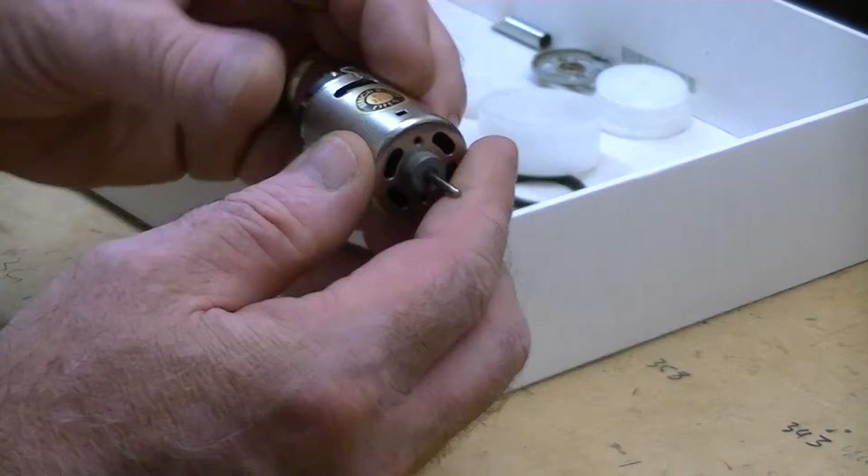I've been working away on the brushed motor reversing pump, and this is the kind of motor I'm using. It's a fairly standard, this is a Mabuchi motor 380S, so it's actually a little bit powerful for this, but there's lots of these 380 motors around, and I think these are the ones to use.

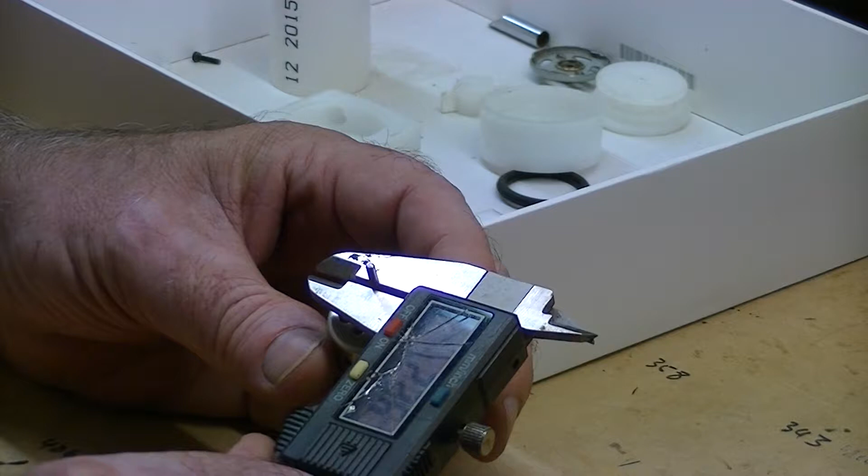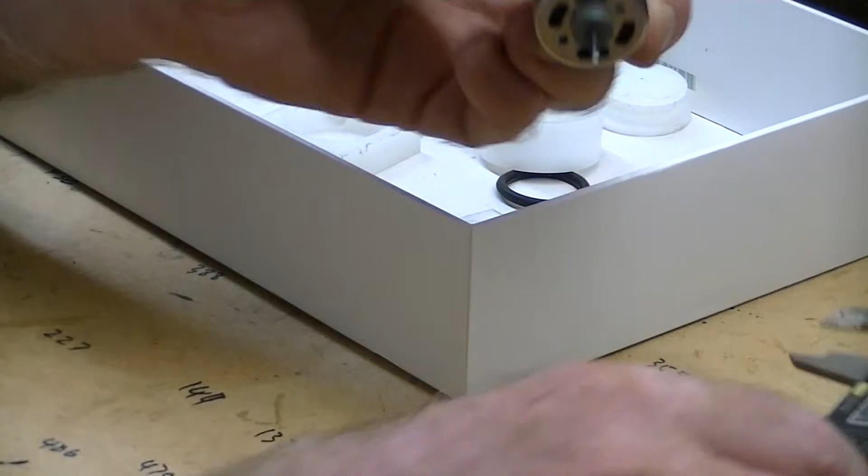The most important thing about this motor is, of course, the width, the thickness of this, which is 2.26 millimeters. They're all much the same, and this critical width here, which is 6 millimeters. So I built this around this. Well, I was going to say too, the other issue is the length of the shaft, because that tells us how much we can build on top.

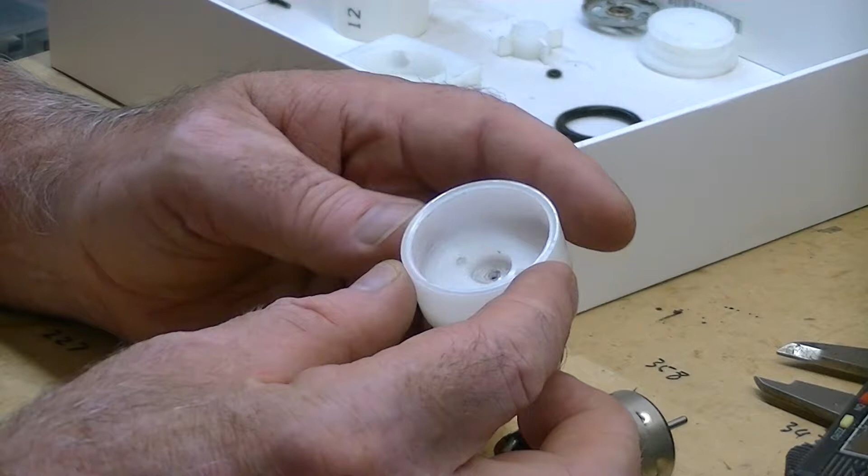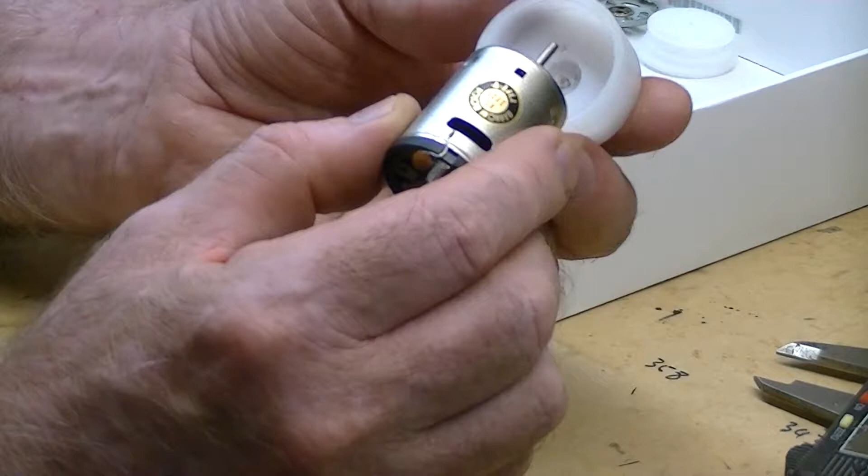So the first thing that I've done, and we'll look at this in a moment in some detail, is to build the mounting for the motor. And the critical parts about the mounting for the motor are the accuracy of these two little things. It's always been very difficult for me to do it, but with 3D printing it should be much easier indeed. So I've put this little groove in here which basically takes care of these little mountings. They're on all of these particular motors, and that screws into here like so.

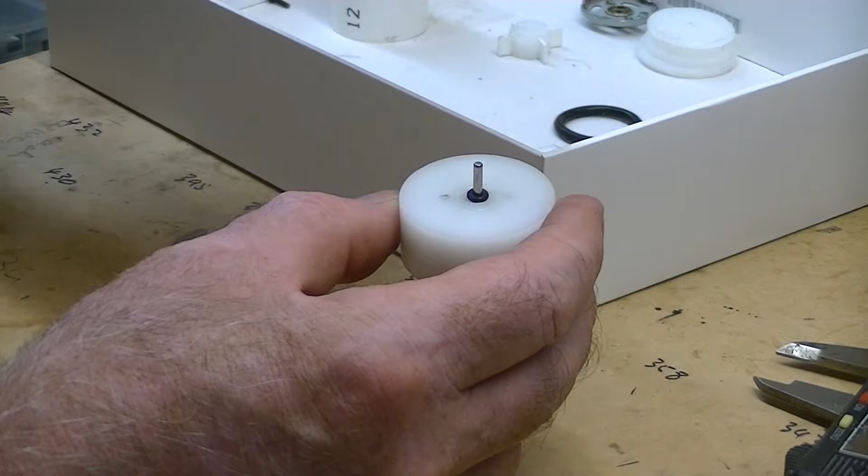There's a little groove in the middle of this too, another little slot, and on here goes our O-ring, and then onto the O-ring we screw this, and this is the holder for the impeller. Now two screws go in here, screw it all together, and as it screws it together it pushes down the O-ring, and this thing won't leak at all.

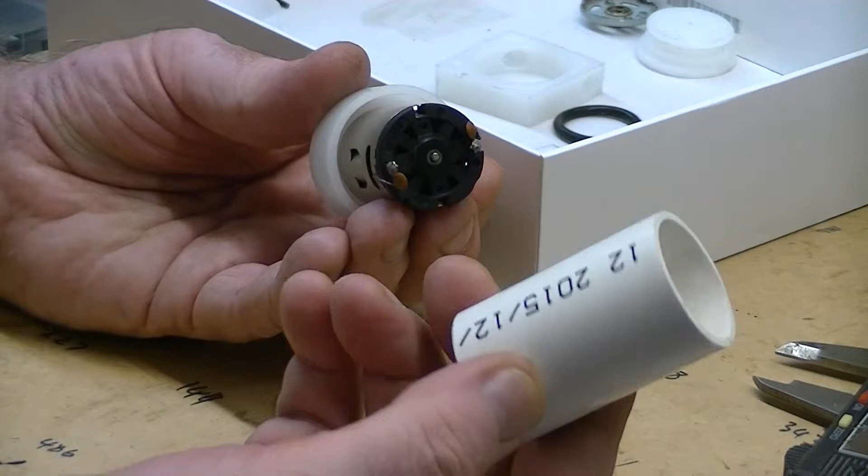Once you've done that, this is the little impeller that I've made. That clunks onto there. It's got a little bit of a gap at the bottom so that it doesn't touch the screws, and then we just have to put a cover on there. The final thing, and I'll take that off just to show you this, is that this is PVC pipe that you get from any hardware store.

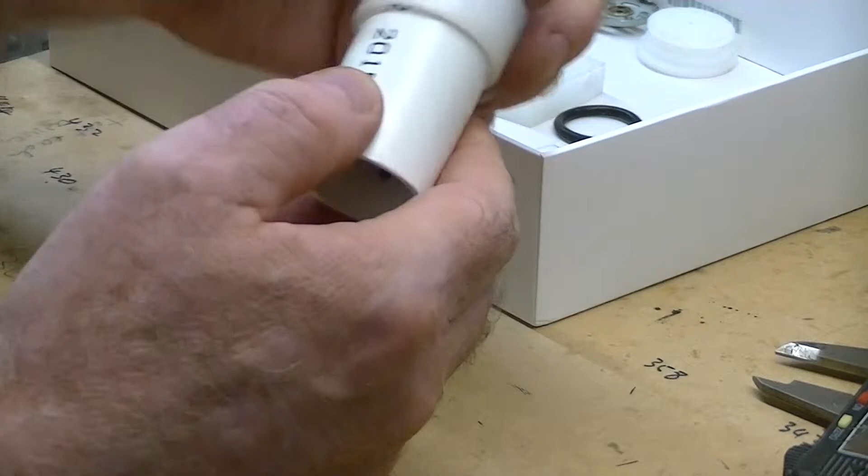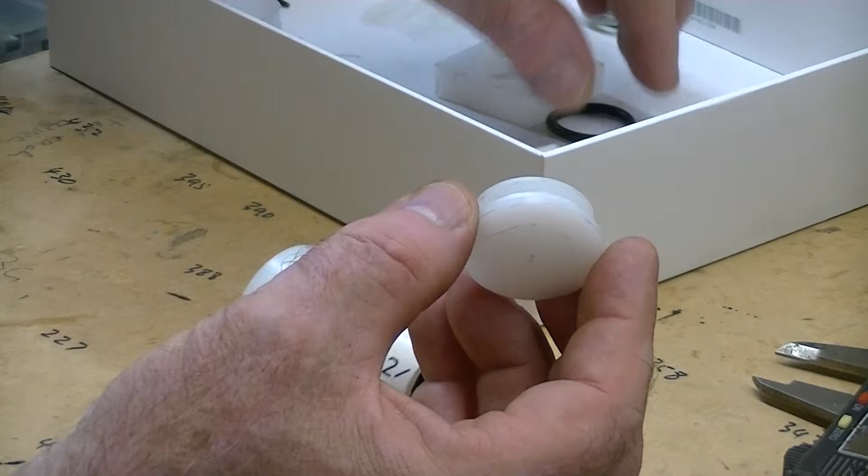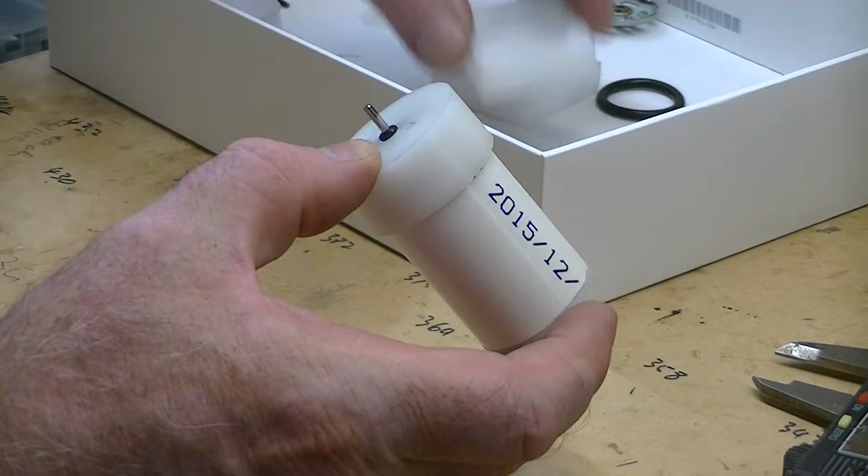It fits into here and pushes very nicely down inside this, and the idea is that we just glue that on, and people can make it any length that they want, and then once they've done that, I've made this little contraption here with another little O-ring that slips over there, slips onto there, and this whole thing is beautifully sealed and will run exceptionally well. I'm not going to put it all together right now, but I thought I'd show you the bits first.

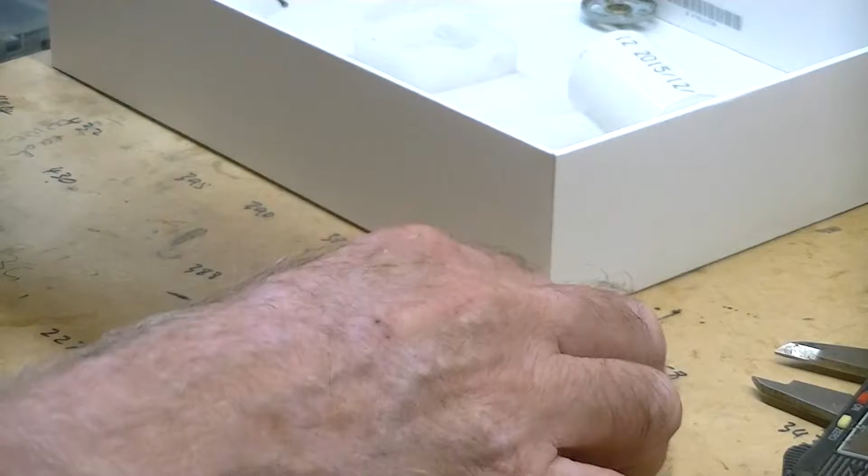So let me show you, to begin with, this one. Okay, so here it is. This is our little gadget, and this is how it all looks. So you can see from the side, I've made it 17 mil thick. Doesn't have to be. I just made it that thickness so that I've got plenty of room to push the PVC pipe in. But the actual interior dimension on this is more important than the exterior, because this makes that connection. And the interior dimension is 33.6 millimeters.

Okay, we go down, we've got these two screw holes at 16 millimeters across, that's from the centers, and they are 2.35 millimeters for a 2.5 mil screw. This little one in the middle is where the prop shaft goes, and it's 2.3 across. It's got a little bit more slack in it because that's not the sealing agent, that little screw in there.

So over here I've got the bigger picture of that. It's 2.3 mil. The slot in here for the O-ring is 5.6 across, and it's 1.5 millimeters deep, which leaves us here around about 1.9, about 0.9 of a millimetre actually taking all of the weight. That's obviously not drawn very well, but they are the dimensions.

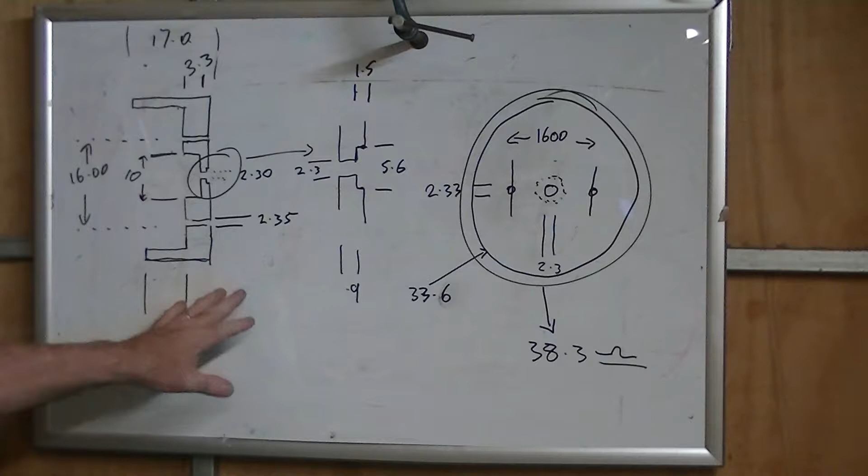So going back to this, if you do that at 17, we need 11.3 in here, because basically what we need is a slot in here for the motor, which is 10 mil across and 3.3 deep. So have you got that? This is the critical area around here with all of that stuff.

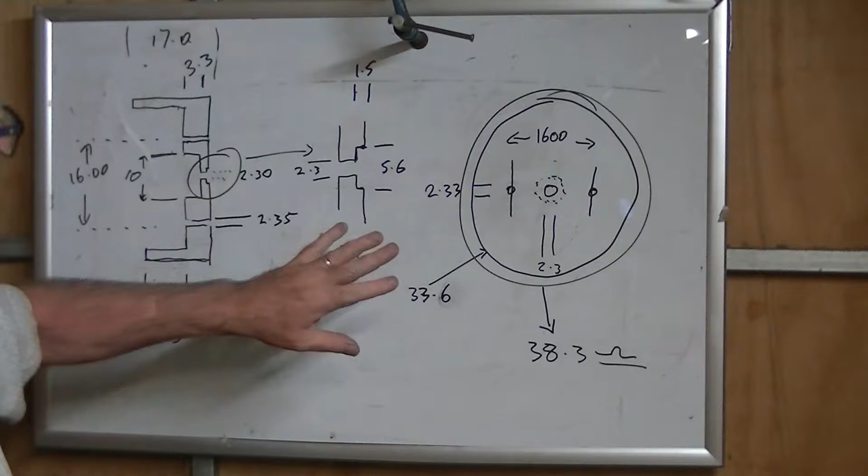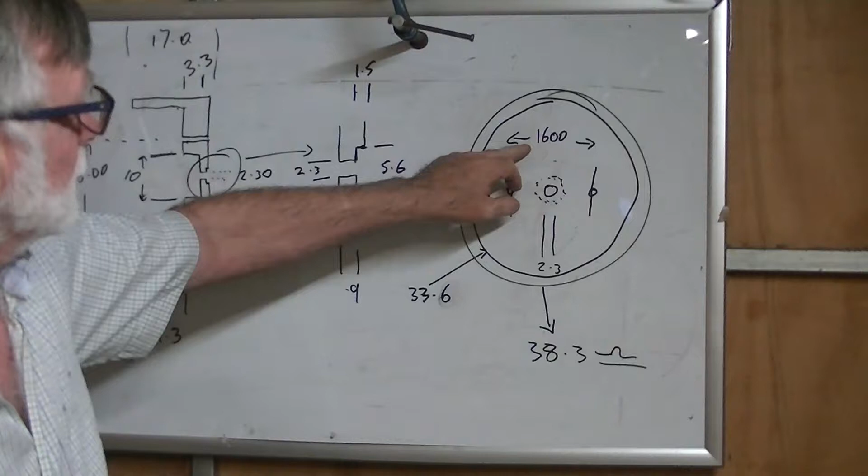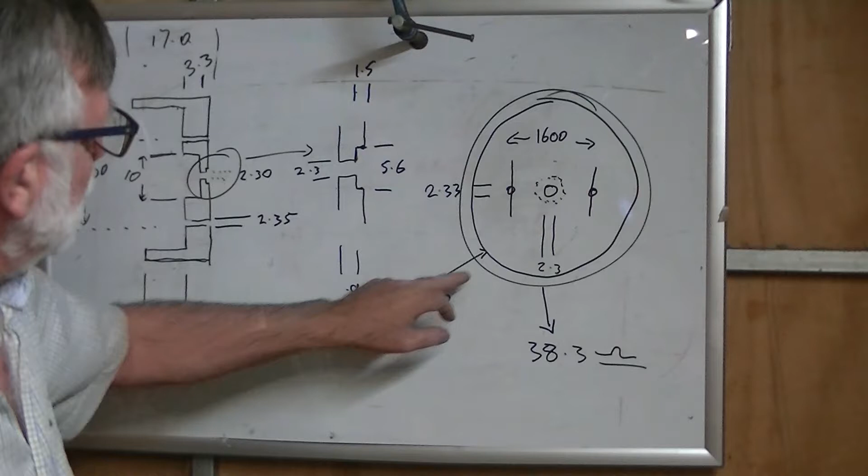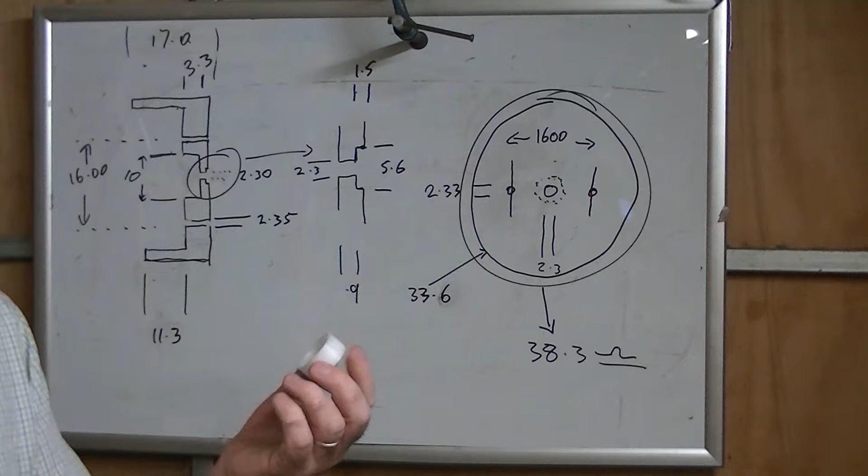Now if we're looking now down onto this, or is it up? Can't remember. Doesn't matter. We've got the centers here at 16 millimeters, 2.3, it should be 2.35 for those. We've got the inside dimension at 33.6, the outside is 38.3, but that's not particularly important. As I said, it's fairly flexible. And that's basically how this sits, and if you can make one of these, fantastic.

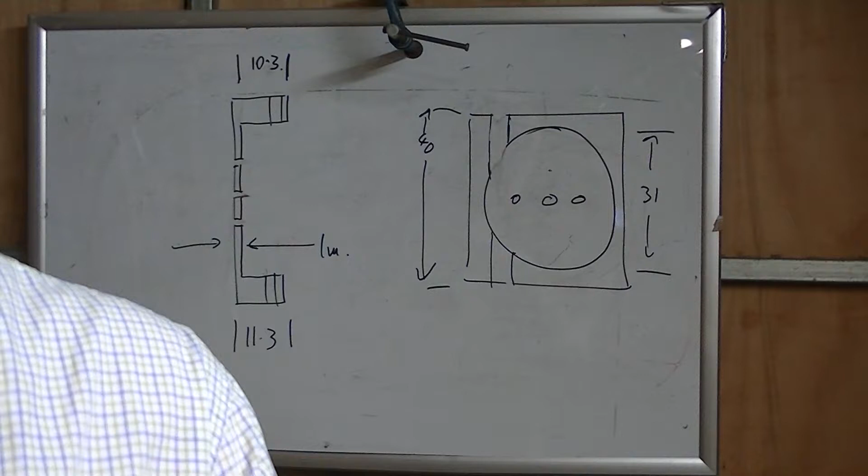Right, now here comes the next piece, and what I didn't show you are these little holes that run right the way through, and this is where we mount the inlet and the outlet from the pump. The thing about this is I've made this square so that it can be screwed into any sort of position, and I've also just put the holes in there, and people really can drill them out and make them as big as they want. It's not really critical, but it might be useful to have some flexibility.

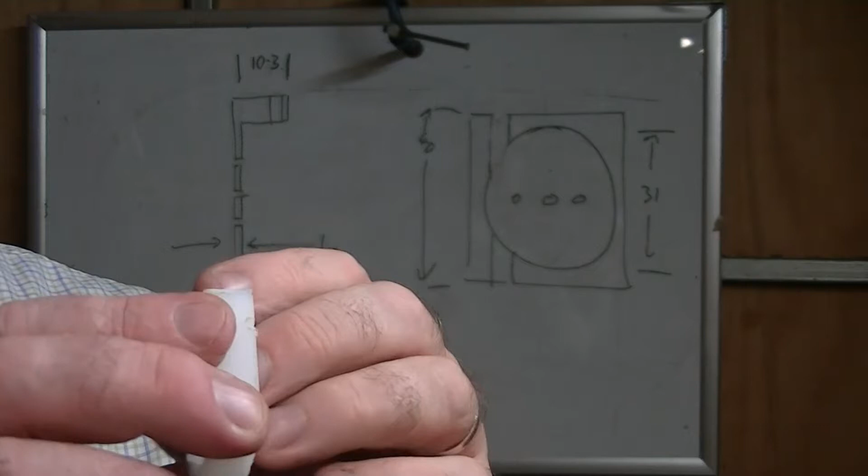So I'm going to suggest that we put a hole in here which is actually a little bit less than the one that I've got here, so people can drill it to the material that they've got. Okay, let's have a look.

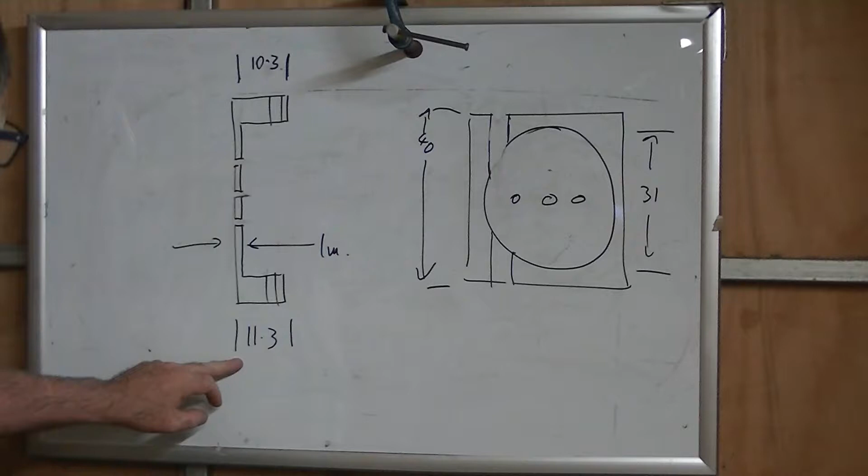So as you can see, the total width is 10.3. No, the total width of this is 11.3. I think I've put a little bit of an extra 0.3 into here, just so that we can better fit the impeller. So it's 11.3 out there, it's 10.3 right the way through, and we've just got 1 millimeter thickness at

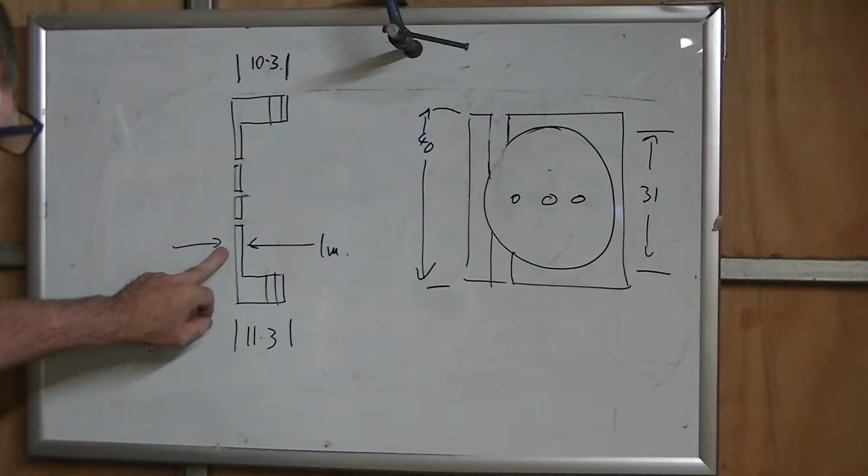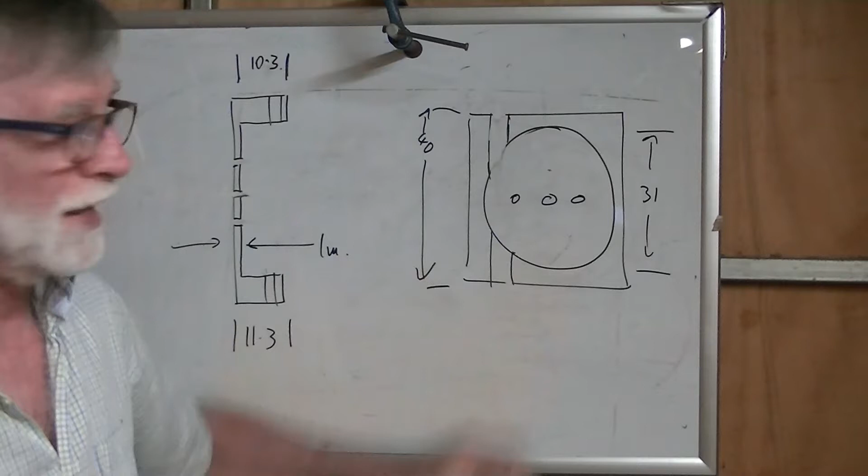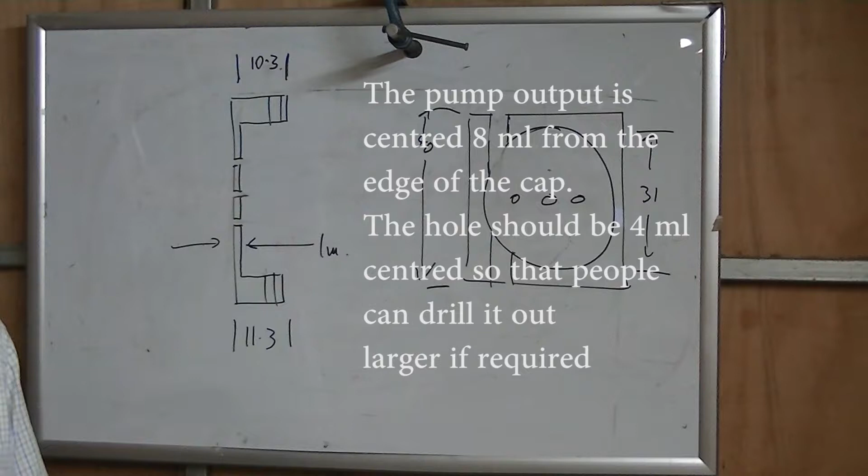the bottom of this. If you look at the side of the square, it's 40 millimeters, and the circular hole in the middle is 31 millimeters, and these holes are identical to the holes that are in the piece below, so we can screw the thing together. I decided that rather than try and put any countersinks on these holes, we'll just leave them as they are, and we'll make the impeller a little bit bigger so that people don't have to worry about it. But that's part 2, and I hope that's all clear.

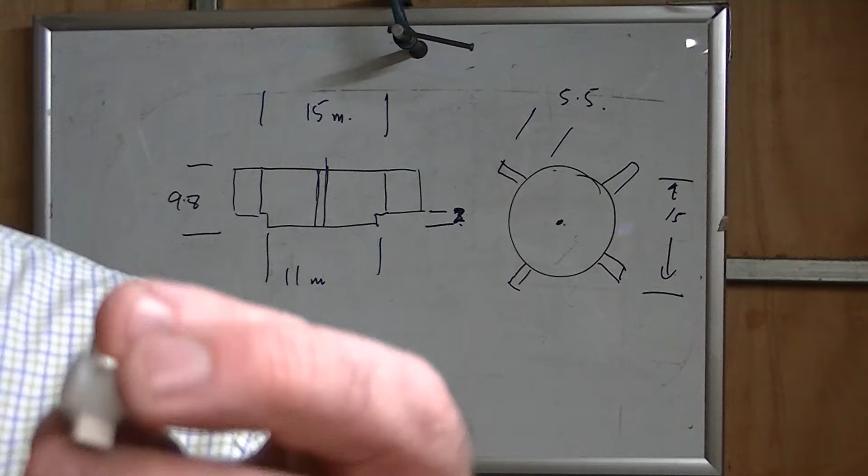Okay, now here is the little impeller, which is just the same as what I built for my other pumps, and I use strong super glue to get these little plastic strips in, and I just cut the slots with a saw. It's as simple as that. So you can see I've got that little extra step at the bottom to miss the screws coming through, and we've got the little hole in the middle.

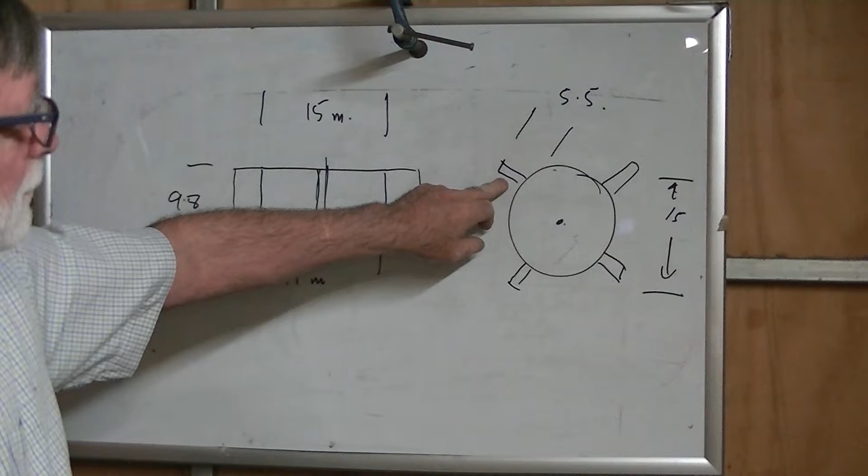So the way this works is, and once again this is relatively arbitrary, I could make this a little bit thicker actually, which I've done in this diagram. So the outside of this is 15 millimeters. It's 9.8 high in total. I've taken 2 millimeters of that off and reduced that down to 11, just so the little slot sits there and we miss the screws. And the impeller parts are 5.5. I've made them a little bit bigger than I have on here.

Now the thickness of this I'm going to leave to you, because it depends on the plastic. We don't want them breaking off. There's a fair bit of distance between them and the edge of the pump itself, and the water can move around that. I've discovered already if I put these right up to the edge, something's going to break. So there's plenty of room for the water to move around and develop a very nice movement within the impeller. So that's it.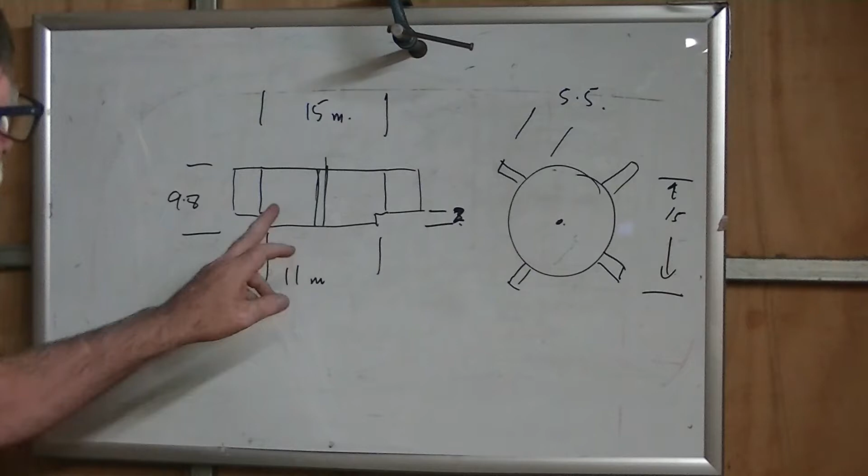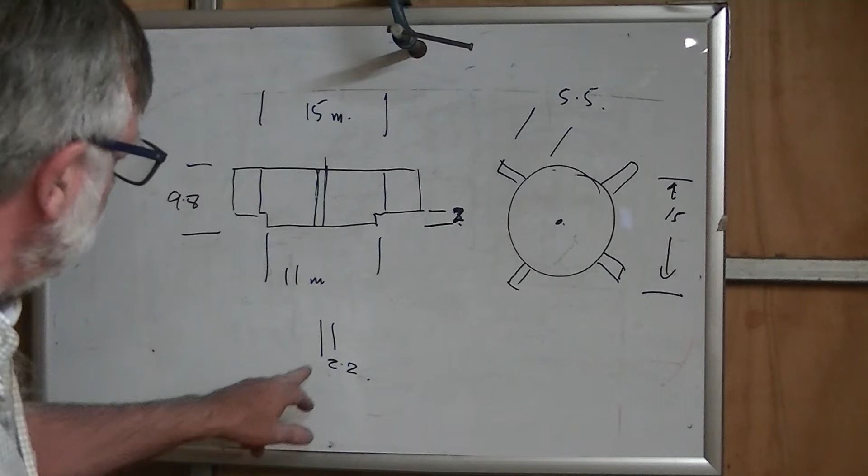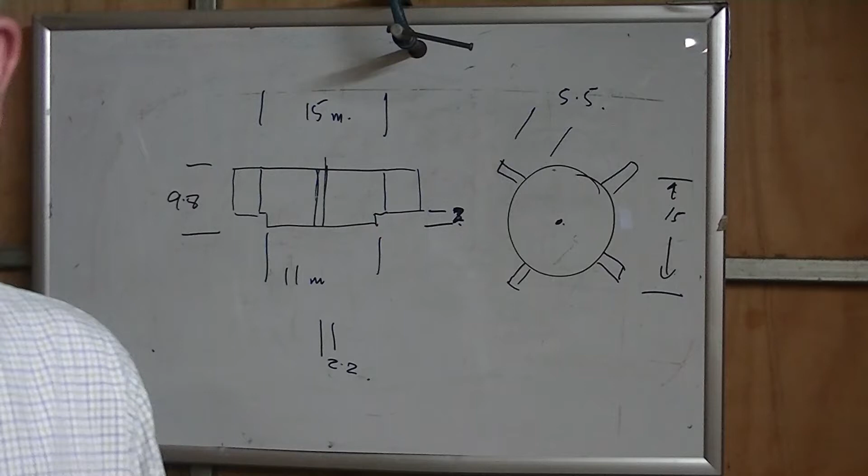Now the critical factor is this central bore. And what I'm going to say is that this should be 2.2 mil because the actual width of the whole thing, of this, is 2.5. Let me just double check that. Yeah, 2.5. And I want this to be quite a nice press to push on.

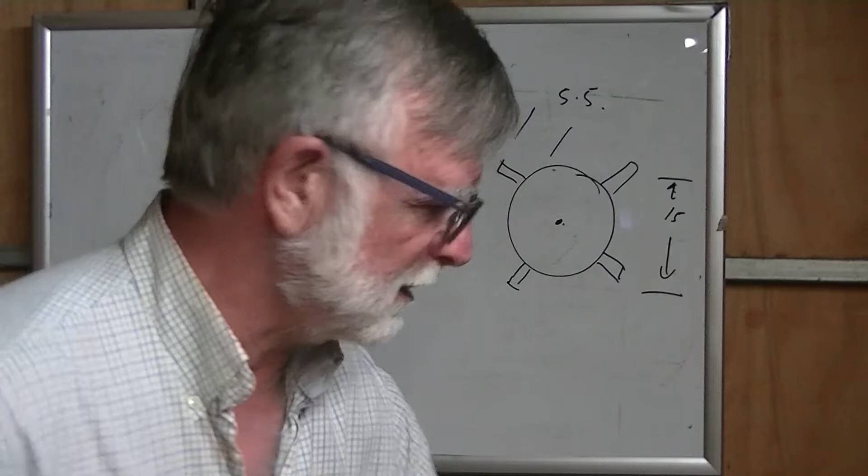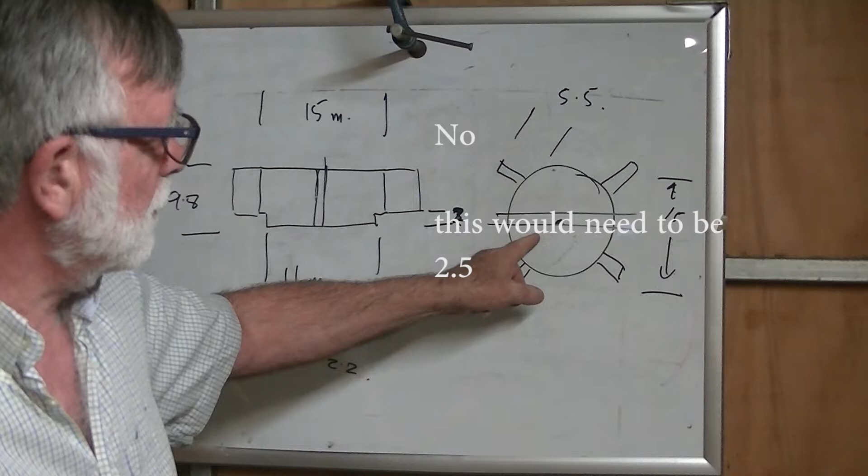Now the other issue, and I'm not sure about this, we'll see how we go, is the notion of putting a drill right through the middle, which would be probably something like a 2.5 drill, and putting a 3 mil grub screw, one in there and one in there, and possibly mounting that, well obviously it will be right in between two of the impellers. But for now, maybe not.

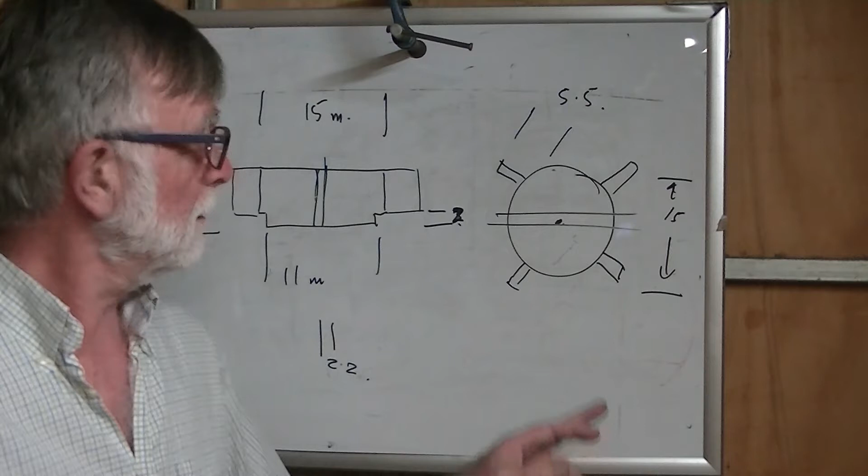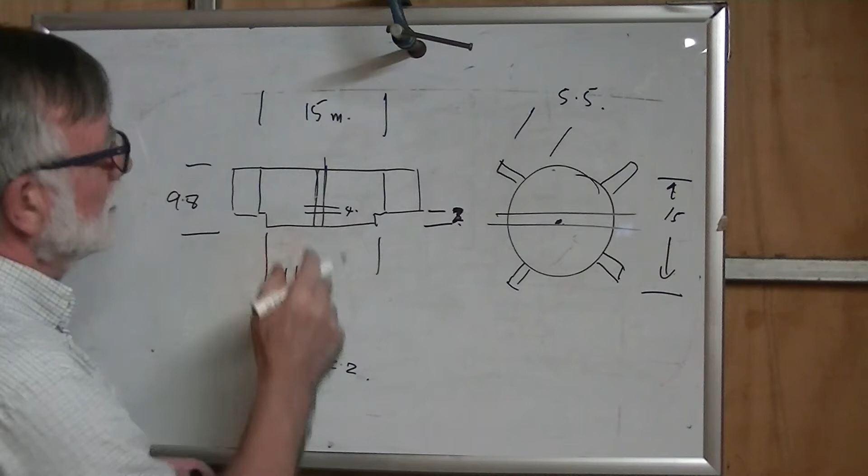What I'm going to suggest, if you can do it, just run that right through the middle. Keep it lower rather than higher, we're probably looking at around about 4 center in the middle of this. There's a number of reasons for that. Make it 2.5 so that we can get a grub screw in there without any tapping or anything like that. That might be a good idea. Okay.

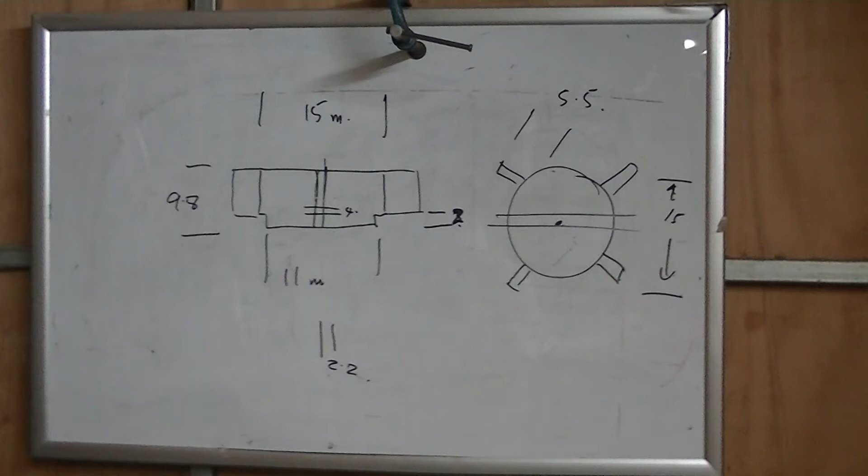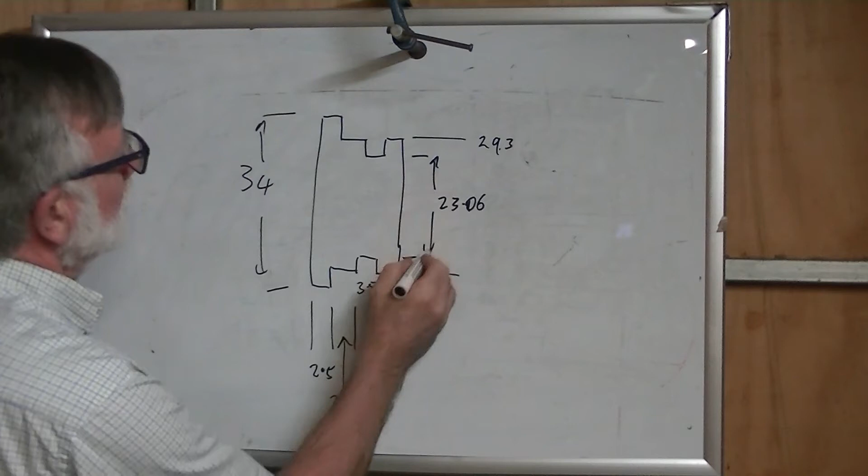Okay, now this is the little cap that runs at the end, and you can see that I've cut into there the slot for the O-ring. The most critical part of this is the depth of that O-ring, 23.06. The other critical factor is the width, which is 3.5. That fits this O-ring perfectly and gives a nice clunk up within that thing.

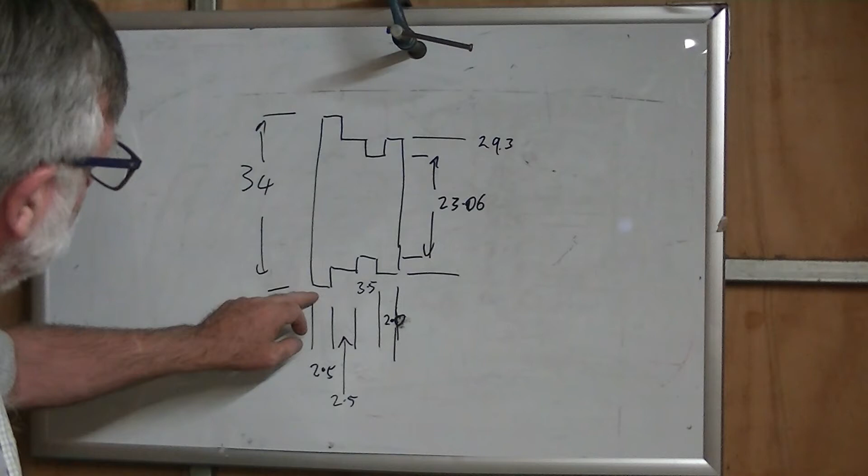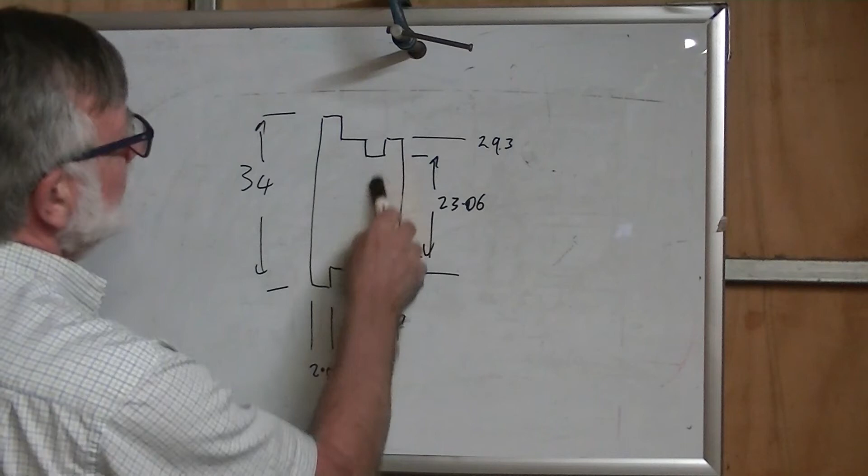So the size of it is 34 mil. I've divided this into 2.5, so we've got 2.5 here, 2.5 here, we've got 3.5 here for the O-ring. We continue with the same width for just another 2 mil, and then cut it off. So the thickness of this is 29.3, and the thickness between the grooves for the O-ring is 23.06. There we go.

Alright, so I guess the next step will be for you to have a look at this and tell me how doable it is. Then make it up, send it to me, and I'll come back to you with possibly some suggestions. But I think this is all pretty good. The question of the water tightness is really nicely answered in this. I think it's going to be fantastic.